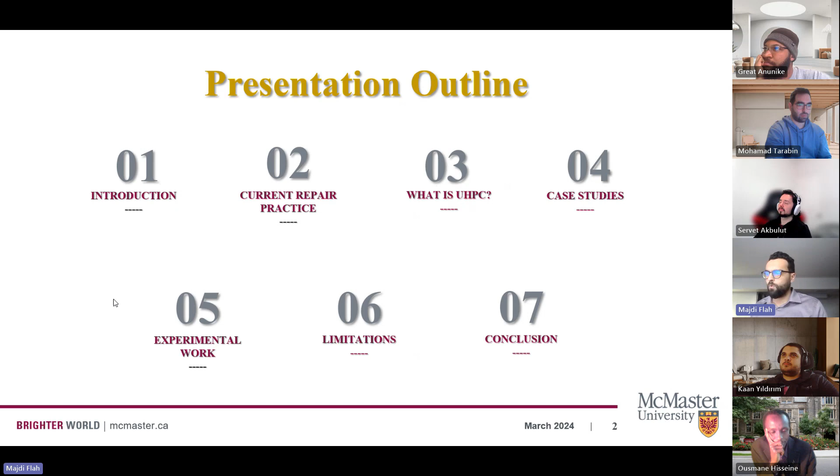So I'm gonna start with an introduction, and then I'm gonna talk about the current repair practice in the industry, then what leads us to the UHPC, then different case studies from the 15 experimental literature review articles. I'm not going to focus on the 15, I'm just going to focus on 5 today, which are the pioneering studies according to my understanding. And then I'm going to talk about the experimental work, limitations, and then we're going to end up with the conclusion.

So nobody can deny that the situation of our infrastructure is getting worse and worse, whether roads, bridges, and all the major infrastructure are worsening with time. It is after 1940, after the Second World War, the revolution in infrastructure, we started having a lot of major infrastructure projects. In the United States, for example, most of the bridges were built after 1940, 1945, having in mind a service life of 50 years. So it looks like we are nearing the end of life of these structures.

So according to the Federal Highway Administration, more than 185,000 bridges are in need of urgent consideration, where more than 46,000 of them are nearing the end of their service life. And the retrofitting budget was $123 billion. A lot of opportunities for research lie behind this number.

So currently, the practice is to repair our infrastructure using steel plates or fiber reinforced laminates. However, despite being successful for a limited time, there are a lot of limitations concerning shear failures, for example, for the steel plates, and the steel by itself is corrosive. For the fiber reinforced polymer laminates, it's a difference in the behavior of the material, because the carbon fiber and the cement don't adapt in terms of, for example, modulus of elasticity and all of that. So we're going to end up having a lot of delaminations and a lot of brittle failures,

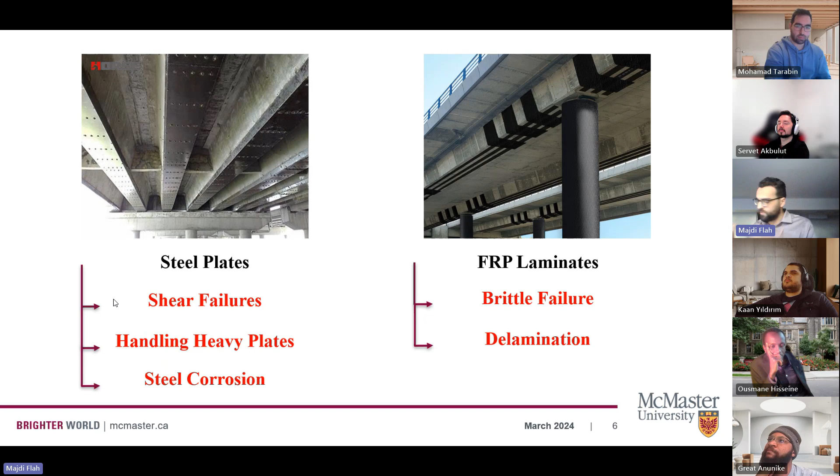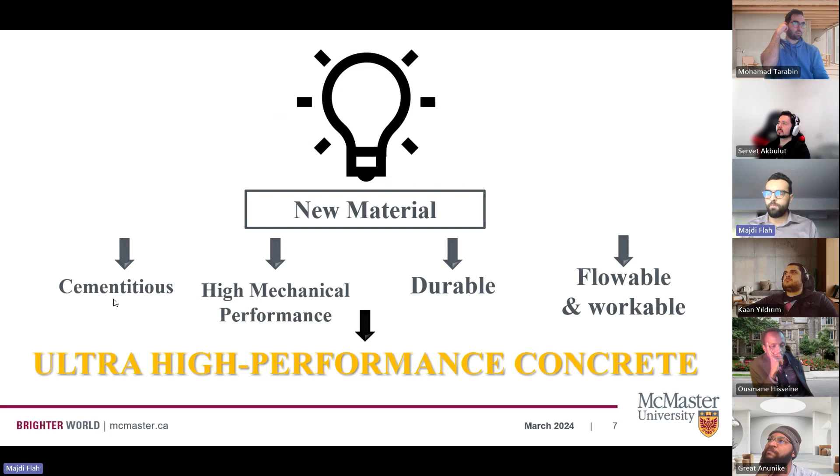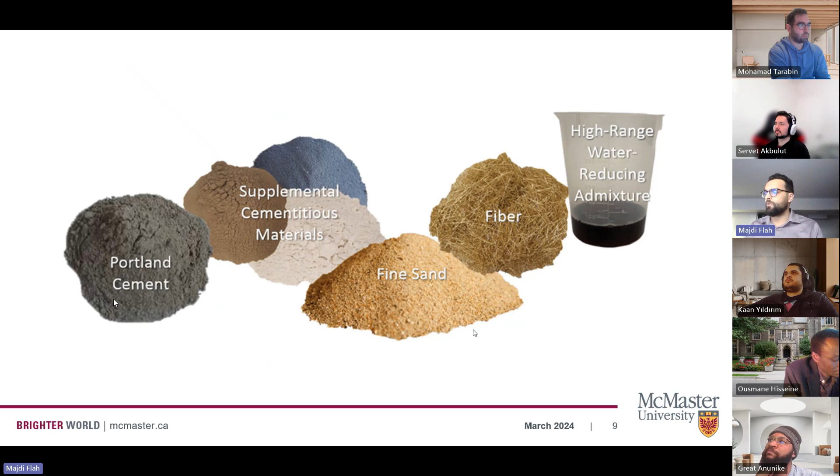which we are trying to avoid. So the idea now is to think of a new material which can be cementitious, highly performant, durable, and at the same time flowable and workable given the tight areas where we're gonna do our repairs. So that's why now we are thinking of an ultra-high performance concrete. So the UHPC is made of cement, SCMs, fine sand, fibers, and high-range water reducers. And the secret behind the formulation of the UHPC is the low water cement ratio.

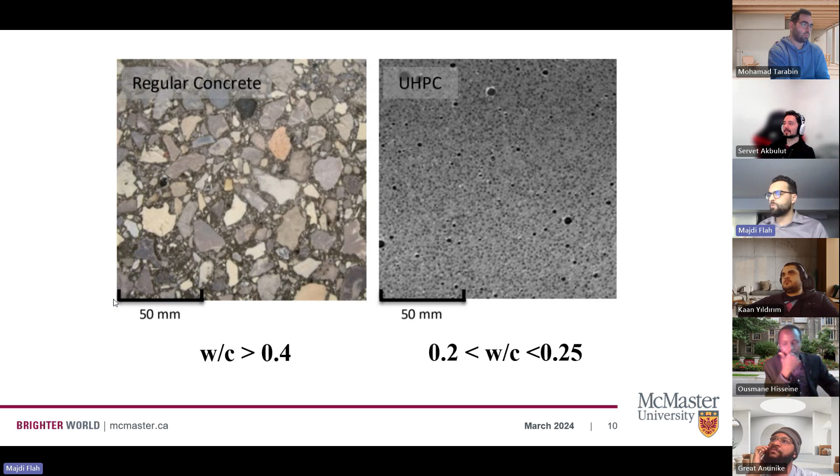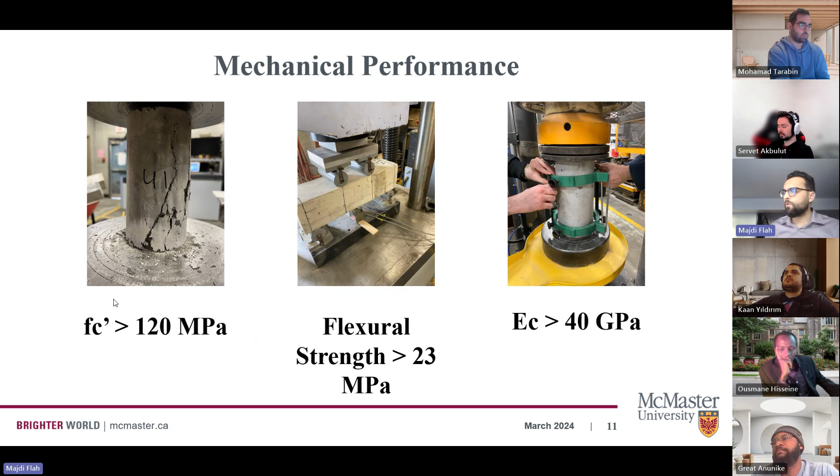This is a representation of how regular concrete particles look and how the UHPC looks. As you can see, for the normal strength concrete, we have a lot of coarse aggregates and a lot of voids between them, for a water cement ratio that usually starts at 0.4. For UHPC, it's a highly dense matrix, and usually the water cement ratio is between 0.2 and 0.25. So for the mechanical performance, there is an agreement that the compressive strength has to be more than 120 MPa. The flexural strength is more than 23 MPa, and the modulus of elasticity of concrete, according to the literature review studies I've reviewed, is always more than 40 gigapascal.

This is a small representation of the difference in durability between UHPC and normal strength concrete.

Sorry, can I please silence my call, please? Yeah.

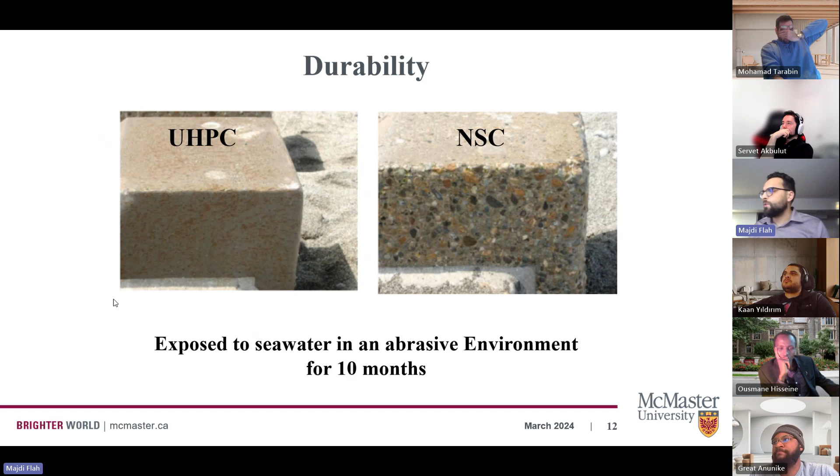Sorry. So that's the difference between UHPC and normal strength concrete. And these are two specimens having the same dimensions, exposed to seawater in an abrasive environment for 10 months. And you can see from the normal strength concrete that there is some scaling there. And it really looks bad.

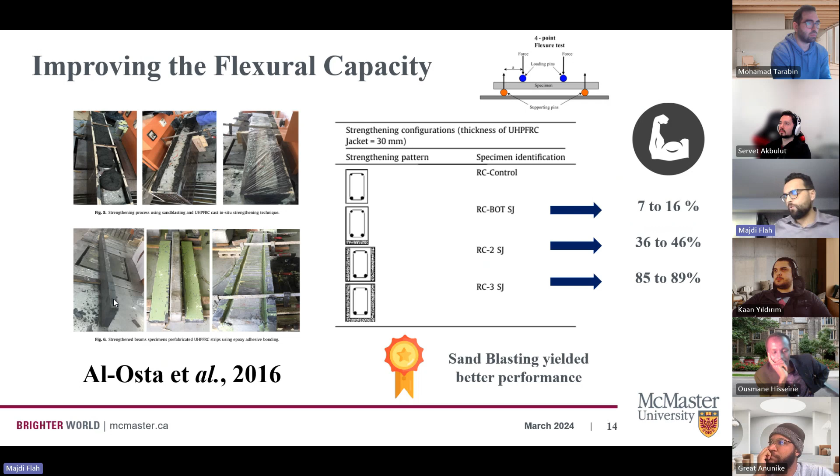The first one tried to put the layer at the bottom, as we did in our experimental study, the second one from the sides, and the third one is going to be like a U jacket, you know. So we can see that there is a lot of improvement, from 7% up to 89% for the three-side jacket. And here the authors tried to compare the sandblasting and the epoxy adhesive bonding. And of course, sandblasting yielded better performance.

However, for that three-sided jacket, there is a problem and there is a significant compromise in ductility. Now we are having the behavior of an over-reinforced concrete beam. And if we define the ductility by a ratio, it's the area of steel reinforcement divided by the amount and configuration of UHPC.

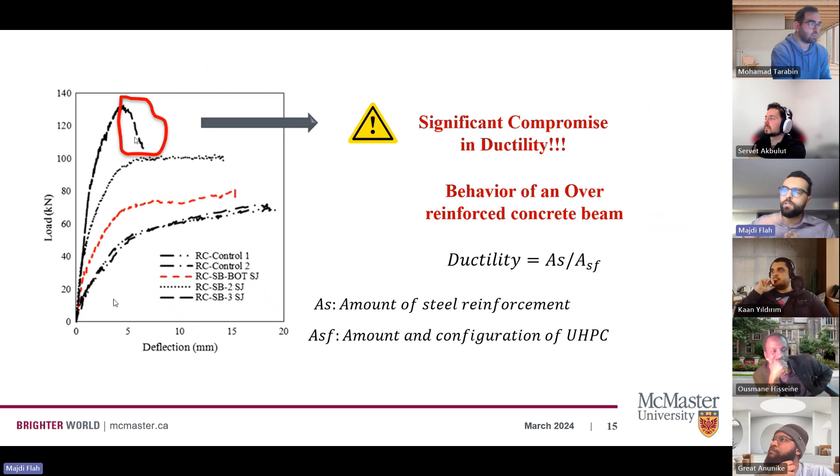Just think about it. When you have a three-side jacket, you have more steel fibers. So it means you have this factor at the bottom. This denominator will be more, so the ductility will decrease. And that's why we don't have any deflection hardening behavior in this curve.

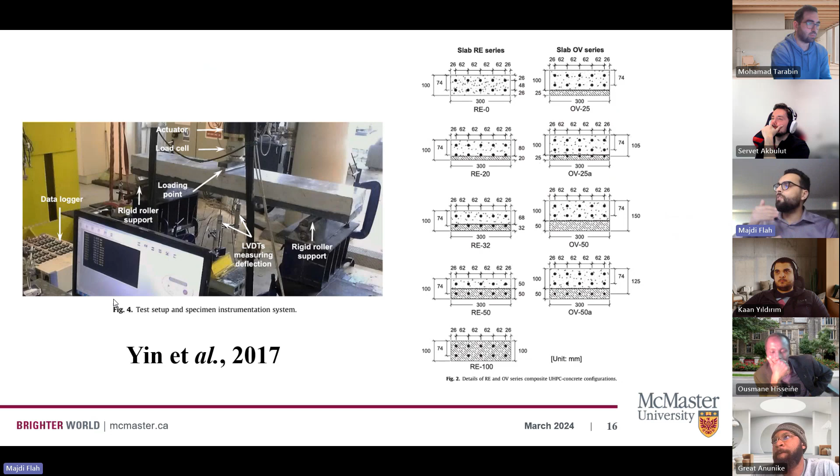The other study was in 2017, which is one of the few studies that focused on the behavior of the slab. So here there are two rehabilitation schemes. The first consisted of keeping the same thickness of the slab while damaging that area like we did in our experimental study, with different thicknesses, 20, 32%, 50, just to compare for UHPC. And for the overlay series, we're going to keep the 100 and put different layers of UHPC, and we're also going to study the behavior of putting reinforcement inside the UHPC layer.

So there is an interesting behavior here, which is, for example, for the specimen RE0, the ultimate cracking load was 61.08. When we add UHPC, it's going to be less than the normal strength concrete. When we go more, it's going to decrease more. So there is a problem, right? The authors investigated that the UHPC layer that reaches up to exactly the top of the reinforcement is going to prevent the shear transfer between the longitudinal reinforcement and the concrete, which will lead to a weak interface and lower the ultimate load. So the idea behind this study is we can provide reinforcement as long as we respect the minimum cover between the edge of the rebar and the interfacial transition zone.

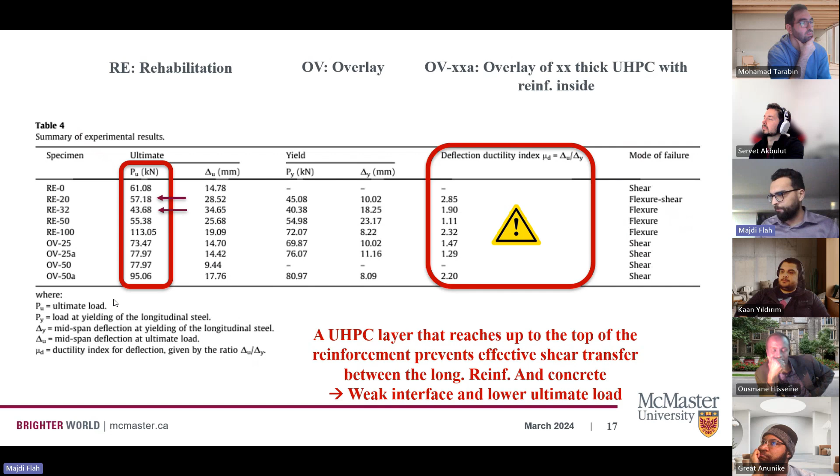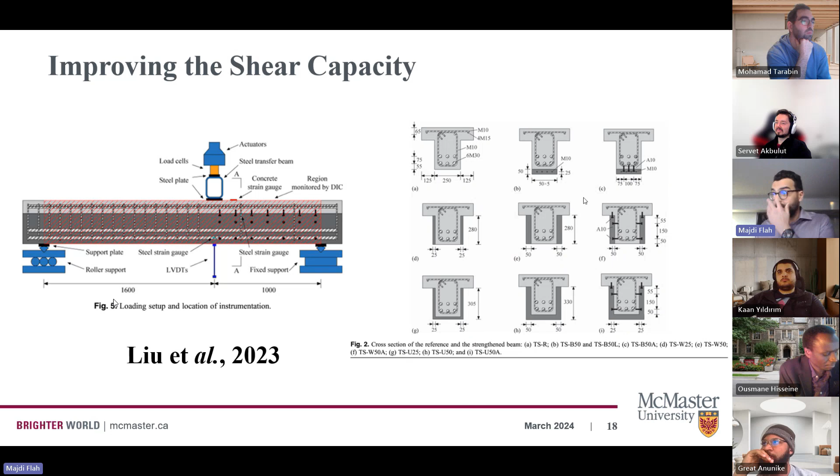This is another study that tried to investigate the shear capacity. It's a concrete T-beam. They tried more or less the same configuration of having a bottom layer and side layers and a U jacket. So you can see in some of the studies, they tried to put some shear studs. The idea there is because they started noticing some failures in the behavior and the shear behavior. That's why they tried to put some studs in order to limit that reduction in shear. Again, UHPC did a very good job, and we are having up to 133% for the ultimate shear capacity and up to 84% for the cracking capacity, as mentioned here.

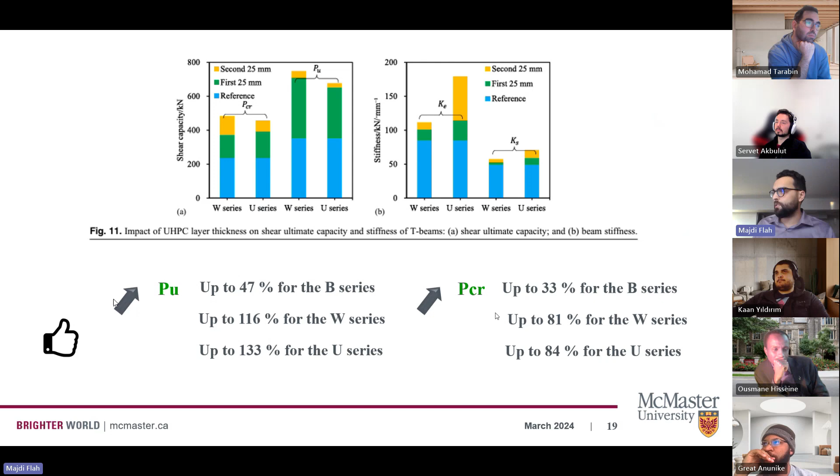However, when we put the UHPC layer at the bottom, it's not really practical to have it up to the ends or up to the supports, because let's say that you have a bridge. Under the supports, we're going to have the bearing pads. So that area is very limited. So we cannot really put our UHPC layer. So the authors tried to investigate that behavior as mentioned here, and they found out that the cracking capacity decreased up to 15%, and we started having a lot of separation failures in that area. So for that reason, they tried to put some shear studs in order to improve the behavior. But even with the shear studs, there is a very low contribution to the shear capacity and beam stiffness. Bearing in mind, we have a greater ductility in that situation.

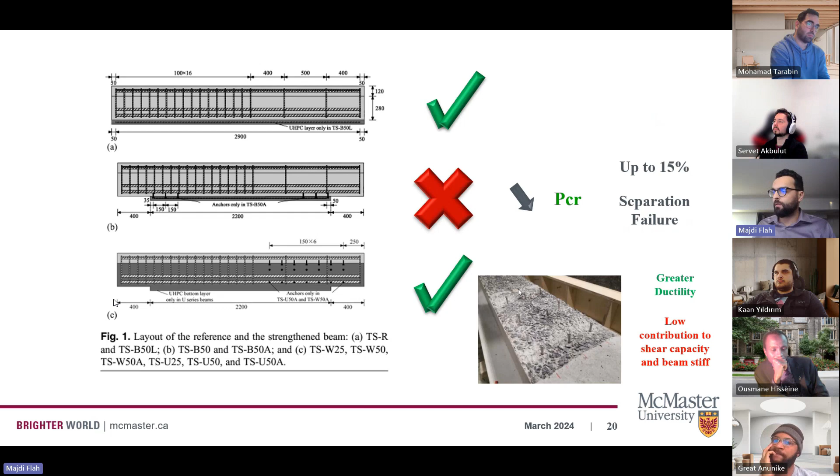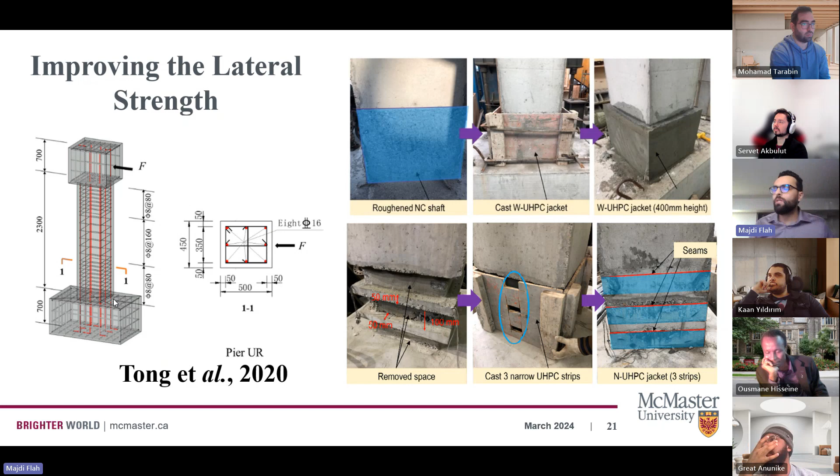So we need to think about the UHPC performance in there. This is a comparison between the two. The first one, we had some spalling and crushing in the interface between the footing and the column. When we put the UHPC jacket, you can see we don't have any problems with spalling. It's just some minor cracks along the shaft of the column. When we move to the multi-narrow strips, here it's a better behavior, less cracking.

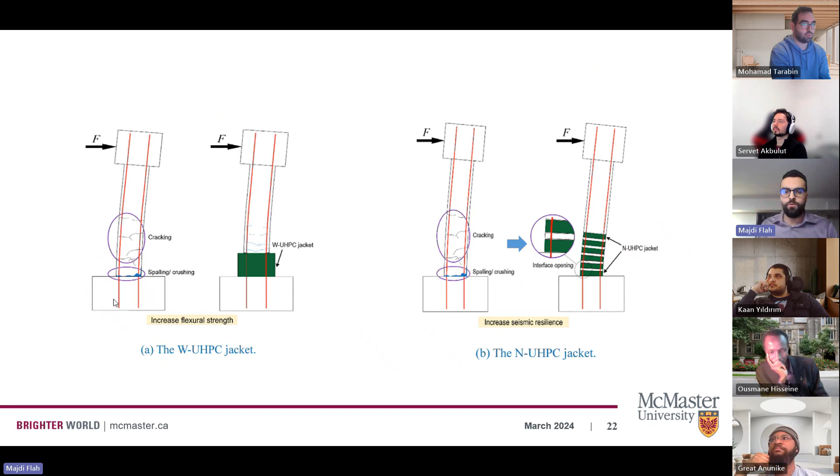Here, the authors are trying to compare which one we can use when we have a need for flexural strength and which configuration we can use when we need more seismic resilience. So this is the reference configuration. We are exposing our columns to different drift percentages. And for the UHPC jacket, we have an issue that the author talked about called plastic hinge relocation.

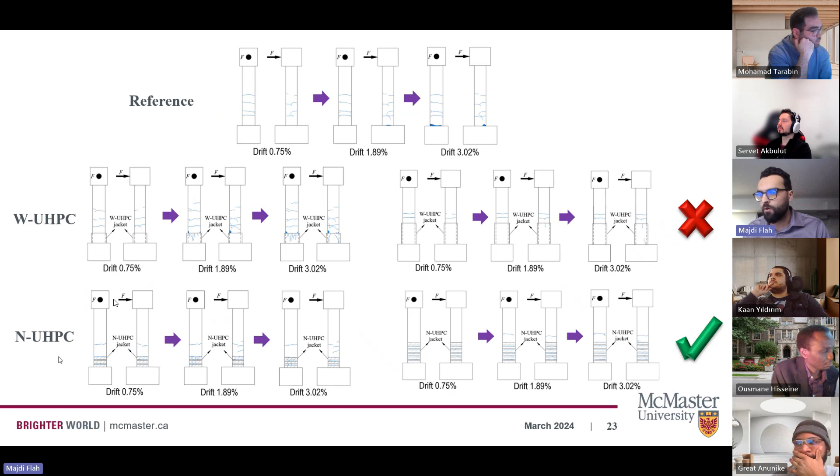So let's say that we want to repair this specific area here. And let's say that the plastic hinge is around, for example, 1 meter. So I'm going to put my UHPC jacket into that area between the footing and the column, but you know what? The plastic hinge that caused this kind of damage in here is going to relocate to the top portion, which is going to be a problem, right? So here we need to bear in mind these ideas when we design our UHPC to prevent this kind of problem that can happen in the future. For the N-UHPC, we didn't have this kind of issue, and for this reason, to improve the seismic resiliency, the authors have voted for this kind of repair.

Now, talking about torsion, this study tried to investigate beams in torsion. They tried to fully wrap the beam, U-jacket it, or jacket left and right from the sides, and of course, the full wrapping will yield a better performance, whether for the cracking torque or the ultimate torque. But when I think about it, does it make sense? Is it practical to have a full wrap in the industrial context? Of course not, right? Because it's a monolithic pouring, and the top portion, you don't have any control over it.

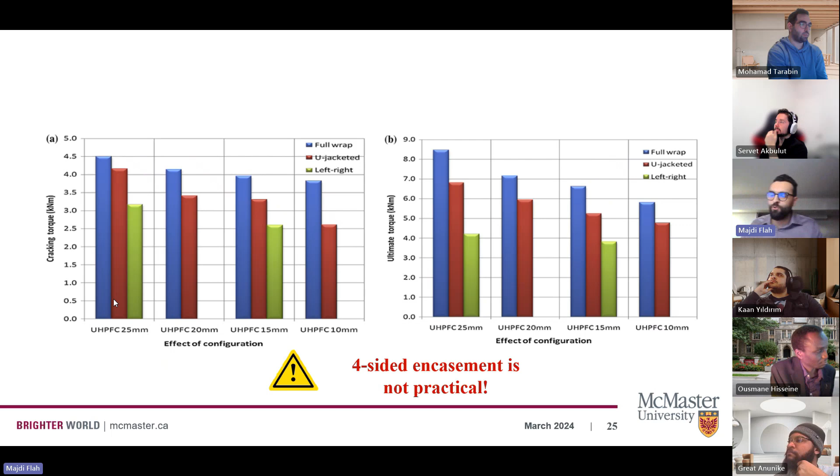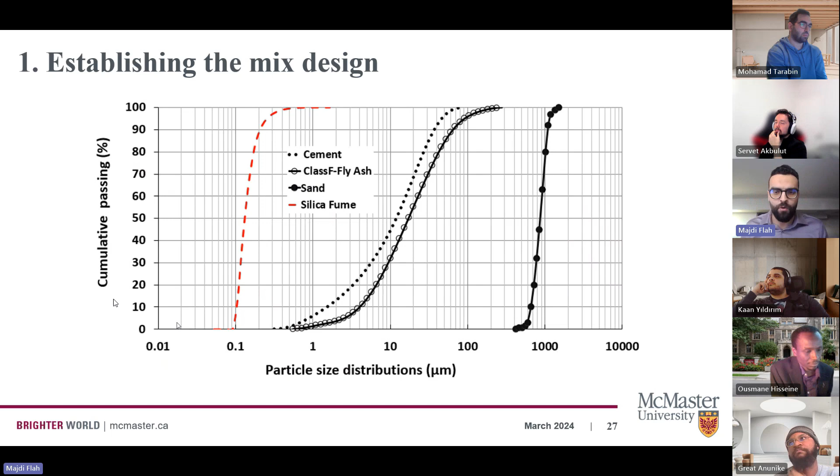So now we'll move to our experimental study. We started first by establishing the mix design. We did the particle size distribution. We tried to have a wider distribution for our particles. The particle size distribution was optimized using the EMMA software and using the modified Andreasen model, and the factor q was equal to 0.21 for this study.

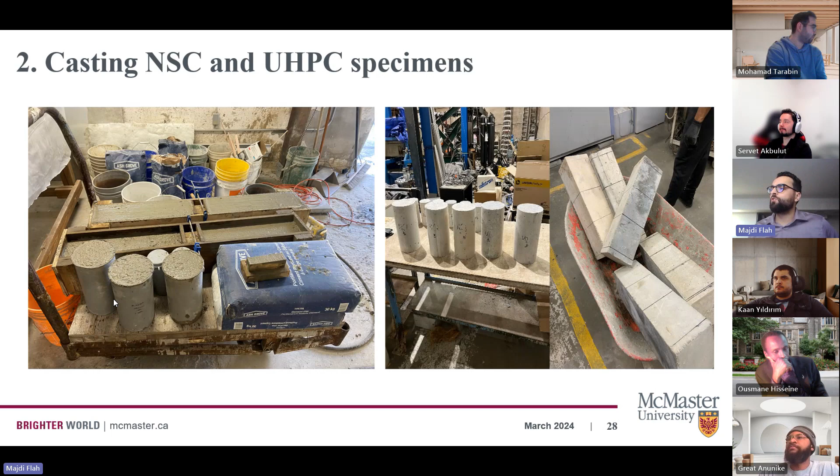So we went to the lab. We cast all the different specimens we have for the modulus of elasticity, for the compressive strength, and for the flexural strength. So these are some pictures from our studies.

And talking about the mechanical properties now of UHPC. As Great mentioned in the beginning, we had almost 117, I would say, MPa compressive strength, which wasn't expected because we were expecting more than 120. But given the size of the silica fume we got, it looks like that's reasonable. For the flexural strength, a very big increase, almost 5 times that of normal concrete. And for the elastic modulus, there is also a good increase from 28 to 43.1 gigapascals.

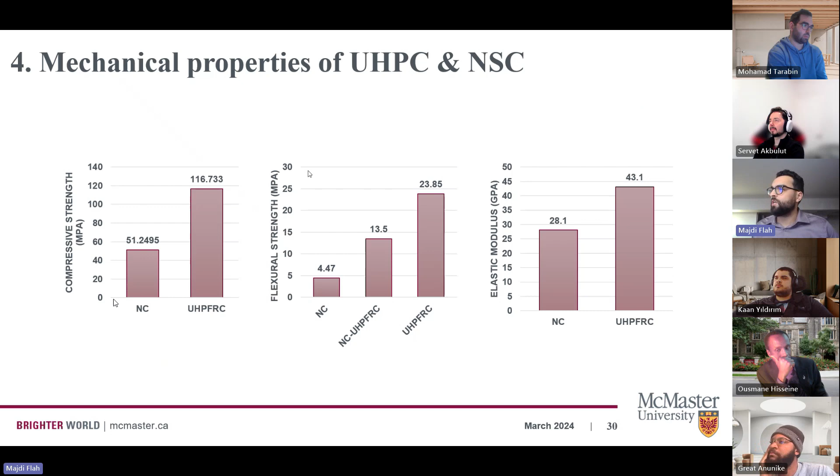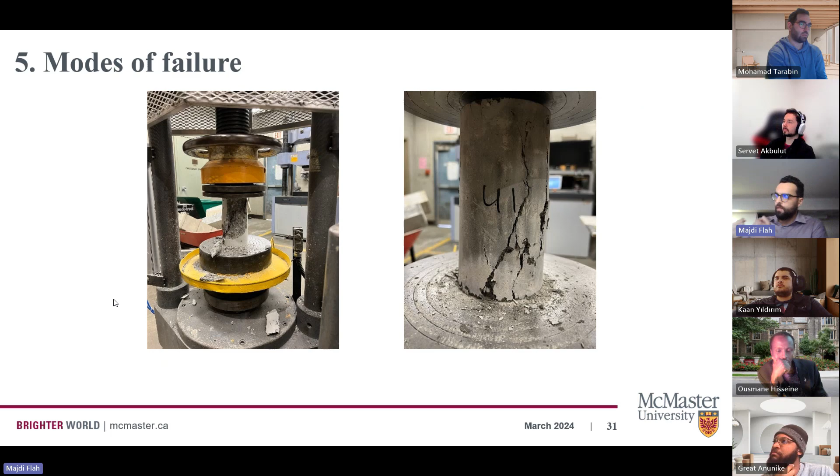Talking about the modes of failure, looking at the picture on the left, which is the cylinder for the compressive testing, we can see that for normal strength concrete, there is a big spalling. All the area is being crushed, and all the chunks are being distributed over the area there. However, when we look at the UHPC specimen, we can see that the fibers are doing a very good job trying to limit the cracked area and the spalling area, as shown in here.

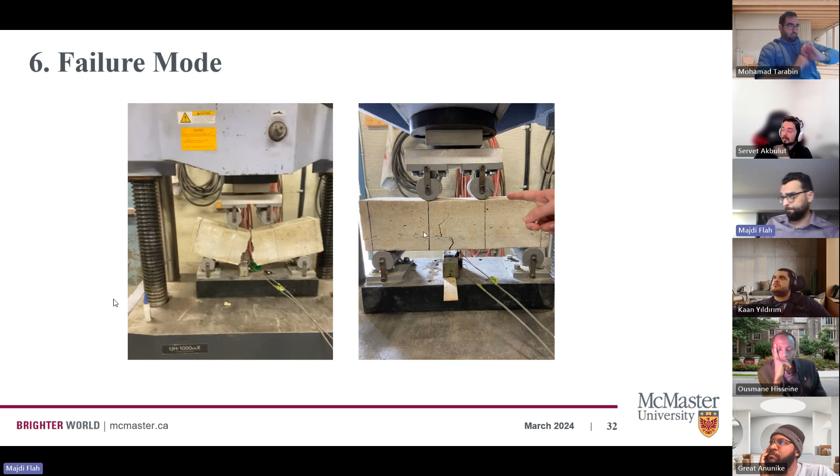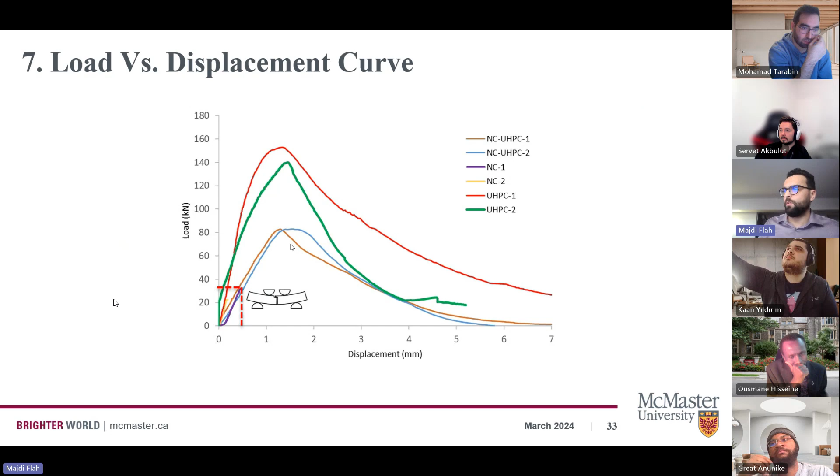Let's talk about the limitations now. So first of all, I'm gonna talk about the limitations in the form of questions. I'm gonna ask you guys and ask myself at the same time. So first of all, when we add these UHPC layers, we're gonna have a lot of issues. I've seen that in at least 9 studies of 15 talking about the brittle failure, when we add more than enough in terms of the layer thickness, in terms of the configuration of where you're gonna put exactly your jackets or your UHPC layers.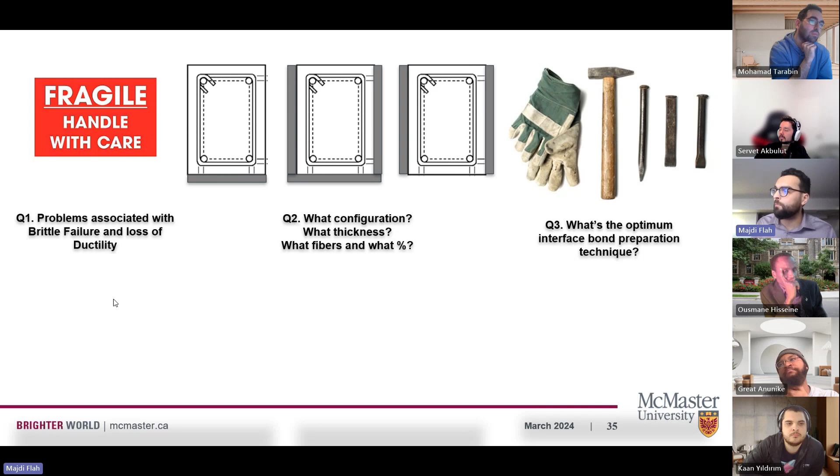The second thing is basically what configuration? Is it only top or bottom or sides or U jackets? What's the thickness? Is it 25, 50, 75? What fibers? And also at what percentage? Then, what's the optimum interface bond preparation technique? Every study you see, sandblasting is the best. Epoxy adhesive is the best. But can we provide a rational way on how to provide an optimum interface bond between the UHPC and the normal strength concrete? And then, how can we make the interfacial transition zone between them stronger?

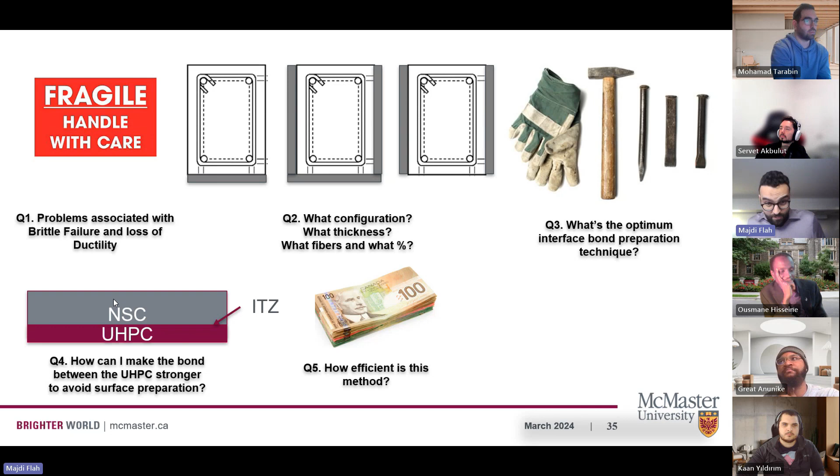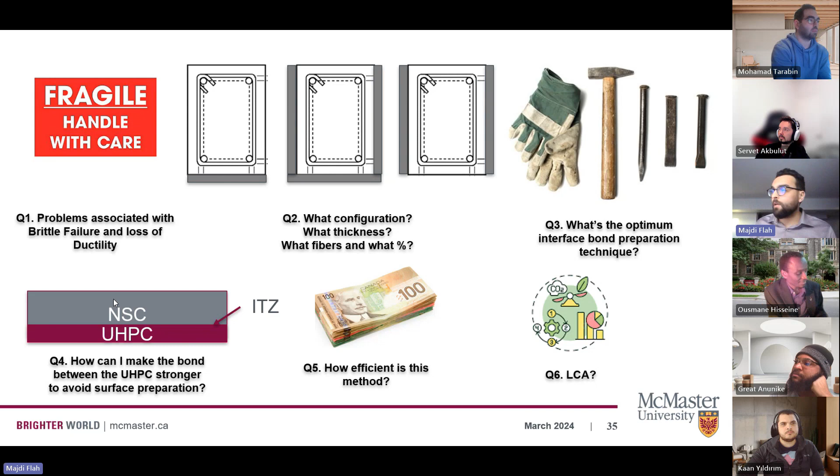Maybe even thinking in a crazy manner without even putting any preparation. Because I'm thinking from a practical perspective on the industry side, this kind of chiseling and hammering is going to take a lot of time. And I know that people in the industry don't like that kind of issues. Then, how efficient is this method? Is it costly? Is it better to keep using steel plates? That's another story. And at the end, bringing my perspective, life cycle analysis. I didn't see any study talking about the life cycle analysis for UHPC in repair applications. So this can be a very good introduction for some research papers as well.

Now we're going to conclude our work. Having a little knowledge about machine learning, deep learning, artificial neural networks, and generative adversarial neural networks, I think that there are a lot of opportunities for people in computer vision to apply deep learning to study the different failure modes using convolutional neural networks, for example, because it's been applied for a long time on normal strength concrete. But I have seen that the failure modes of UHPC are very different from normal strength concrete. So let's think of a way on how we can characterize it using machine learning and deep learning.

The second thing is I see a lot of trial and error in mixing the concrete. We always have this kind of issues, like what's gonna be the appropriate constituent in silica fume, what's fly ash, and let's think also about the microscopic way. What's gonna be the C3S and C2S in the ordinary Portland cement, and what kind of cement we're gonna use. And then at the end, a recent trend now is to use generative adversarial neural networks. So based on the performance you need in terms of durability, in terms of cost, in terms of life cycle analysis, carbon dioxide emissions, whatever parameters you want, we can provide you with the mix design that can respond to all your questions.